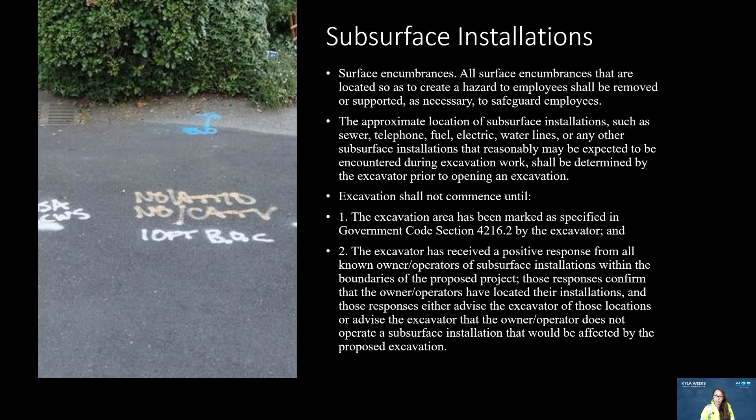When the excavation is proposed within 10 feet of a high-priority subsurface installation, the excavator shall be notified by the facility owner-operator of the existence of a high-priority subsurface installation before the legal excavation start date and time in accordance with Government Code Section 4216.2a, and an on-site meeting involving the excavator and the subsurface installation owner-operator's representative shall be scheduled by the excavator and the owner-operator at a mutually agreed upon time to determine the action or activities required to verify the location of such installations.

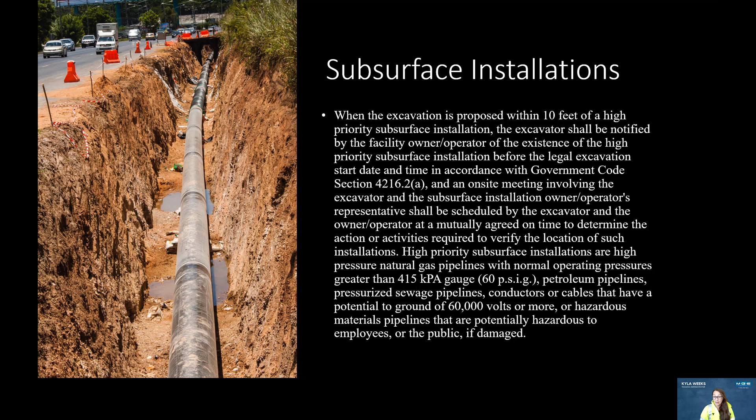High-priority subsurface installations are high-pressure natural gas pipelines with normal operating pressures greater than 415 kPa gauge (60 psi-g), petroleum pipelines, pressurized sewage pipelines, conductors or cables that have potential to ground of 60,000 volts or more, or hazardous material pipelines that are potentially hazardous to employees or the public if damaged.

All regional notification centers as defined by Government Code 4216J in the area involved, and all known owners of subsurface facilities in the area who are not members of a notification center, shall be advised of proposed work at least 2 working days prior to the start of any digging or excavation work. Exception: repair work to subsurface facilities done in response to an emergency as defined in Government Code Section 4216D.

When excavation or boring operations approach the approximate location of subsurface installations, the exact location of the installation shall be determined by safe and acceptable means that will prevent damage to the subsurface installation as provided by Government Code Section 4216.4. While the excavation is open, subsurface installations shall be protected, supported, or removed as necessary to safeguard employees.

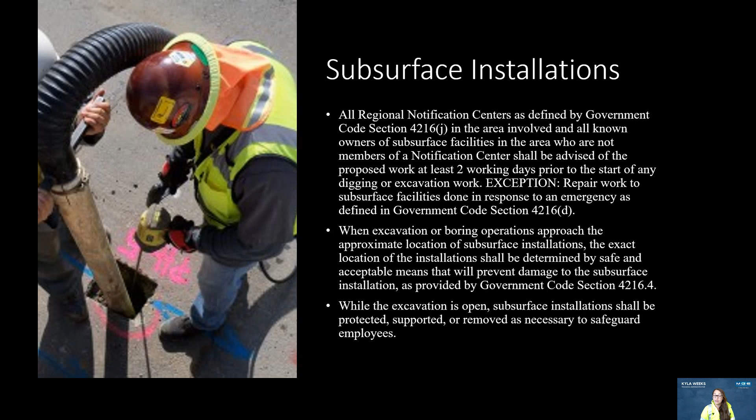An excavator discovering or causing damages to a subsurface installation shall immediately notify the facility owner-operator or contact the Regional Notification Center to obtain subsurface installation operator contact information immediately, after which the excavator shall notify the facility operator. All breaks, leaks, nicks, dents, gouges, grooves, or other damages to an installation's lines, conduits, coatings, or cathodic protection shall be reported to the subsurface installation operator.

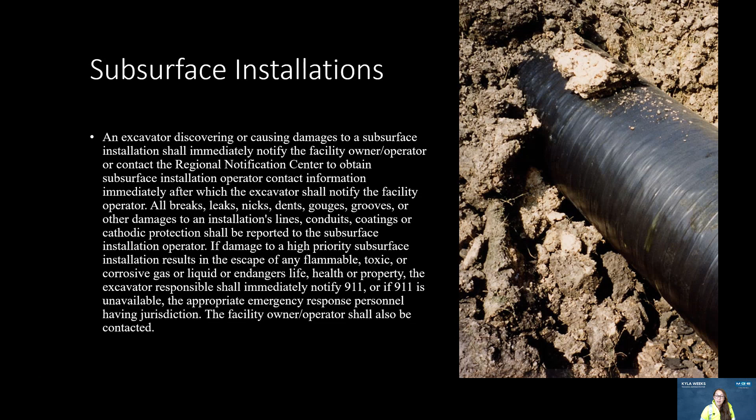If damage to a high-priority subsurface installation results in the escape of any flammable, toxic, or corrosive gas or liquid, or endangers life, health, or property, the excavator responsible shall immediately notify 911, or, if 911 is unavailable, the appropriate emergency response personnel having jurisdiction. The facility owner-operator shall also be contacted.

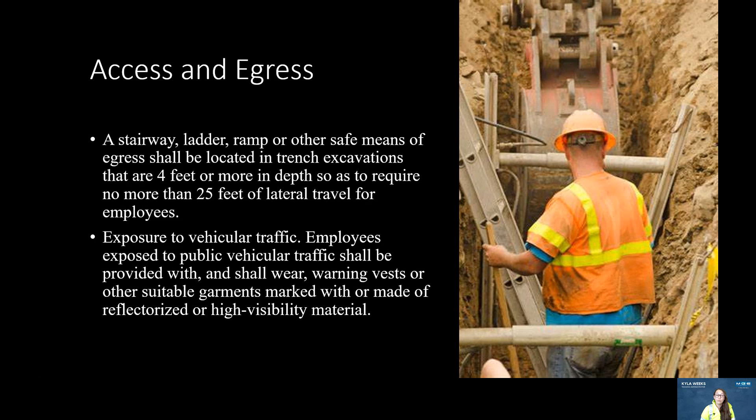Access and egress. A stairway, ladder, ramp, or other safe means of egress shall be located in trench excavations that are 4 feet or more in depth, so as to require no more than 25 feet of lateral travel for employees. Exposure to vehicular traffic. Employees exposed to public vehicular traffic shall be provided with and shall wear warning vests or other suitable garments marked with or made of reflectorized or high visibility material.

Exposure to falling loads. No employee shall be permitted underneath loads handled by lifting or digging equipment. Employees shall be required to stand away from any vehicle being loaded or unloaded to avoid being struck by any spillage or falling materials. Operators may remain in the cab of vehicles being loaded or unloaded when the vehicles are equipped in accordance with Section 1591E to provide adequate protection for the operator during loading and unloading operations.

Warning system for mobile equipment. When mobile equipment is operated adjacent to an excavation, or when such equipment is required to approach the edge of an excavation, and the operator does not have a clear and direct view of the edge of the excavation, a warning system shall be utilized, such as barricades, hand or mechanical signals, or stop logs. If possible, the grade should be away from the excavation.

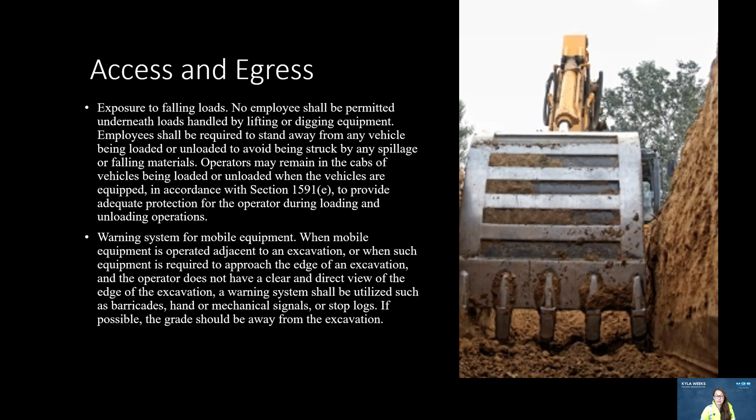Hazardous atmospheres: where oxygen deficiency, atmospheres containing less than 19.5% oxygen, or a hazardous atmosphere exists or could reasonably be expected to exist, such as in excavations in landfill areas or in areas where hazardous substances are stored nearby, the atmosphere in the excavation shall be tested before employees enter excavations greater than 4 feet in depth.

Adequate precautions shall be taken to prevent employees' exposure to atmospheres containing less than 19.5% oxygen and other hazardous atmospheres. These precautions include providing proper respiratory protection or ventilation. Adequate precautions shall also be taken, such as providing ventilation, to prevent employee exposure to an atmosphere containing a concentration of flammable gas in excess of 20% of the lower flammable limit of the gas.

When controls are intended to reduce the level of atmospheric contaminants to acceptable levels, testing shall be conducted as often as necessary to ensure that the atmosphere remains safe.

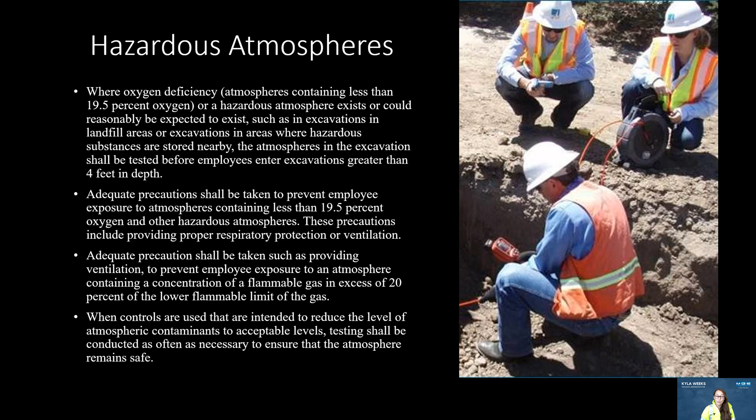Emergency rescue equipment, such as breathing apparatus, a safety harness and line, or a basket stretcher, shall be readily available where hazardous atmospheric conditions exist or may reasonably be expected to develop during work in an excavation. This equipment shall be attended when in use.

Employees entering bell-bottom pier holes or other similar deep and confined footing excavations shall wear a harness with a lifeline securely attached to it. The lifeline shall be separate from any line used to handle materials and shall be individually attended at all times while the employee wearing the lifeline is in the excavation.

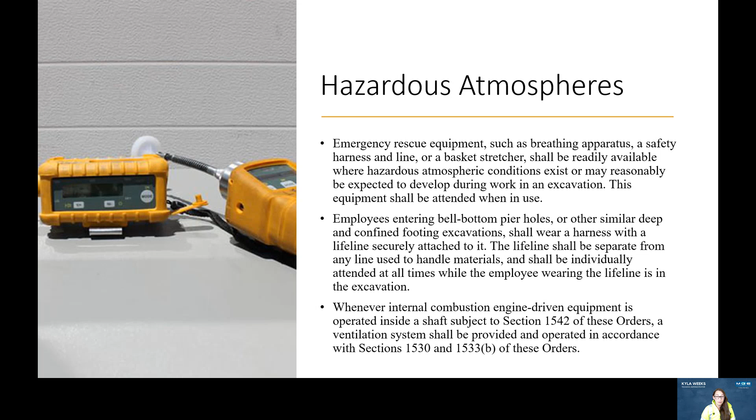Whenever internal combustion engine-driven equipment is operated inside a shaft subject to Section 1542 of these orders, a ventilation system shall be provided and operated in accordance with Sections 1530 and 1533B of these orders.

Water accumulation: employees shall not work in excavations in which there is accumulated water, or in which water is accumulating, unless adequate precautions have been taken to protect employees against hazards posed by water accumulation.

The precautions necessary to protect employees adequately vary with each situation, but could include a special support or shield system to protect from cave-ins, water removal to control the level of accumulating water, or the use of a safety harness and lifeline. If water is controlled or prevented from accumulating by the use of water removal equipment, that equipment in operation shall be monitored by a competent person to ensure proper operation.

If excavation work interrupts the natural drainage of surface water, such as streams, diversion ditches, dikes, or other suitable means shall be used to prevent surface water from entering and to provide adequate drainage of the area adjacent to the excavation. Excavations subject to runoff from heavy rains will require an inspection by a competent person in compliance with Sections 1541 H1 and H2.

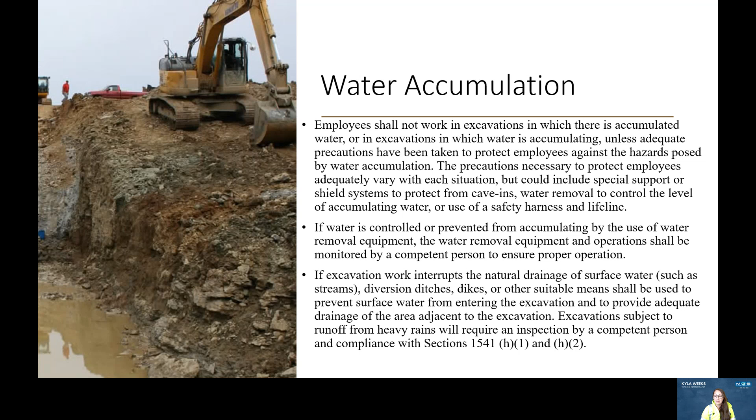Stability of adjacent structures: where the stability of adjoining buildings, walls, or other structures is endangered by excavation operations, support systems such as shoring, bracing, or underpinning shall be provided to ensure the stability of such structures for the protection of employees. Excavation below the level of the base or footing of any foundation or retaining wall that could reasonably be expected to pose a hazard to employees shall not be permitted, except when certain conditions are met.

Such excavation may only proceed when a support system such as underpinning is provided to ensure the safety of employees and the stability of the structure, or the excavation is in stable rock, or a registered professional engineer has approved the determination that such excavation work will not pose a hazard to employees. Sidewalks, pavements, and appurtenant structures shall not be undermined unless a support system or other method of protection is provided.

Appurtenant structures shall not be undermined unless a support system or other method of protection is provided to protect employees from the possible collapse of such structures.

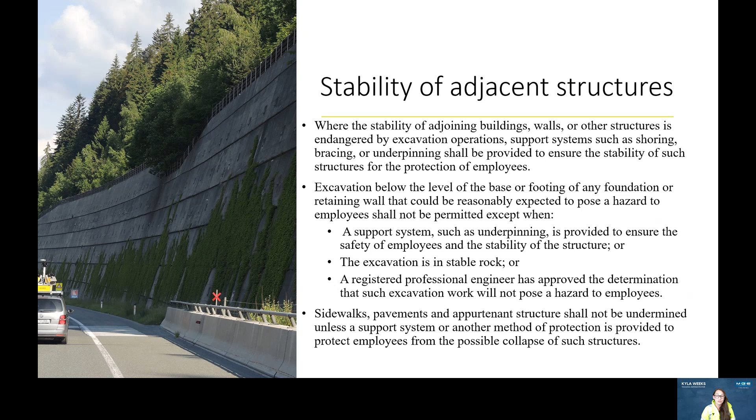Protection of employees: adequate protection shall be provided to protect employees from loose rock or soil that could pose a hazard by falling or rolling from the excavation face. Such protection shall consist of scaling to remove loose material, installation of protective barricades at intervals as necessary on the face to stop and contain falling material, or other means that provide equivalent protection.

Employees shall be protected from excavated or other materials or equipment that could pose a hazard by falling or rolling into excavations. Protection shall be provided by placing and keeping such materials or equipment at least 2 feet from the edge of excavations, or by the use of retaining devices sufficient to prevent materials or equipment from falling or rolling into excavations, or by a combination of both if necessary.

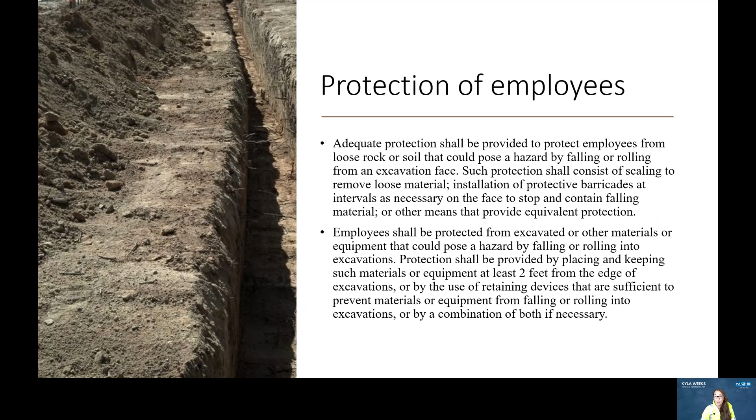Inspection: daily inspections of excavations, the adjacent areas, and protective systems shall be made by a competent person for evidence of a situation that could result in possible cave-ins, indications of failure of protective systems, hazardous atmospheres, or other hazardous conditions. An inspection shall be conducted by the competent person prior to the start of work and as needed throughout the shift. Inspections shall also be made after every rainstorm or other hazard-increasing occurrence.

These inspections are only required when employee exposure can be reasonably anticipated. Where the competent person finds evidence of a situation that could result in a possible cave-in, indications of failure of protective systems, hazardous atmospheres, or other hazardous conditions, exposed employees shall be removed from the hazardous area until necessary precautions have been taken to ensure their safety.

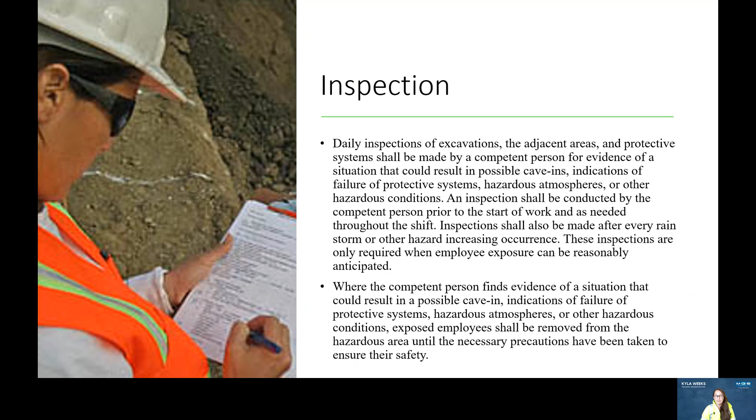Fall protection. Where employees or equipment are required or permitted to cross over excavations over 6 feet in depth and wider than 30 inches, walkways or bridges with standard guardrails shall be provided. Adequate barrier physical protection shall be provided at all remotely located excavations. All wells, pits, shafts, etc. shall be barricaded or covered. Upon completion of exploration and other similar operations, temporary wells, pits, shafts, etc. shall be backfilled.

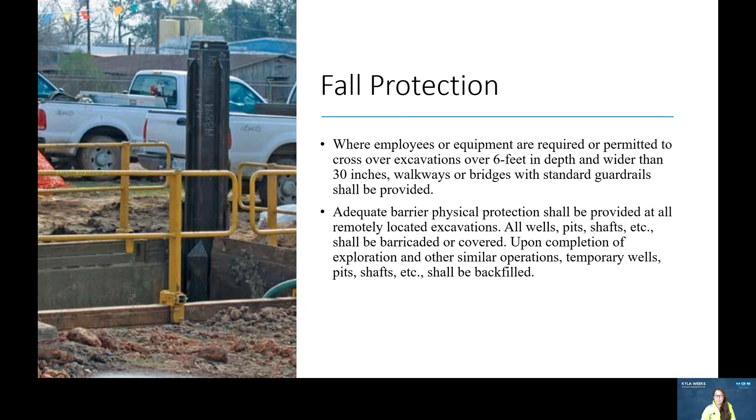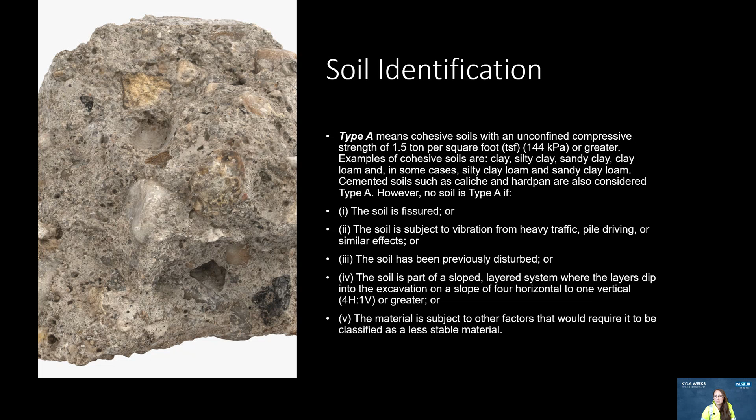Soil identification. Type A means cohesive soils with an unconfined compressive strength of 1.5 ton per square foot or greater. Examples of cohesive soils are clay, silty clay, sandy clay, clay loam, and in some cases, silty clay loam and sandy clay loam. Cemented soils such as caliche and hardpan are also considered type A. However, no soil is type A if the soil is fissured, or the soil is subject to vibration from heavy traffic, pile driving, or similar effects, or the soil has been previously disturbed, or the soil is part of a sloped layered system where the layers dip into the excavation on a slope of 4 horizontal to 1 vertical or greater.

Or the material is subject to other factors that would require it to be classified as less stable material. Type B soil means cohesive soil with an unconfined compressive strength greater than 0.5 TSF, but less than 1.5 TSF, or granular cohesionless soils including angular gravel, similar to crushed rock, silt loam, sandy loam, and in some cases, silty clay loam and sandy clay loam.

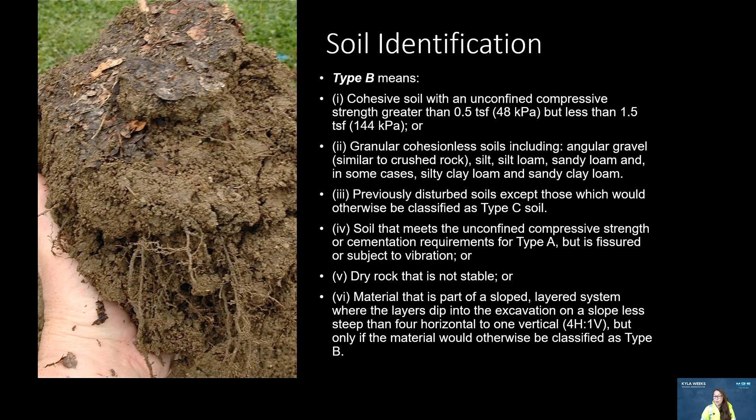Previously disturbed soils, except those which would otherwise be classified as type C soil, soil that meets the unconfined compressive strength or cementation requirements for type A but is fissured or subject to vibration, or dry rock that is not stable, or material that is part of a sloped layered system where the layers dip into the excavation on a slope less steep than 4 horizontal to 1 vertical, but only if the material would otherwise be classified as type B.

Type C means cohesive soil with an unconfined compressive strength of 0.5 TSF or less. Granular soils, including gravel, sand, and loamy sand, or submerged soil or soil from which water is freely seeping, or submerged rock that is not stable, or material in a sloped layered system where the layers dip into the excavation on a slope of 4 horizontal to 1 vertical or steeper.

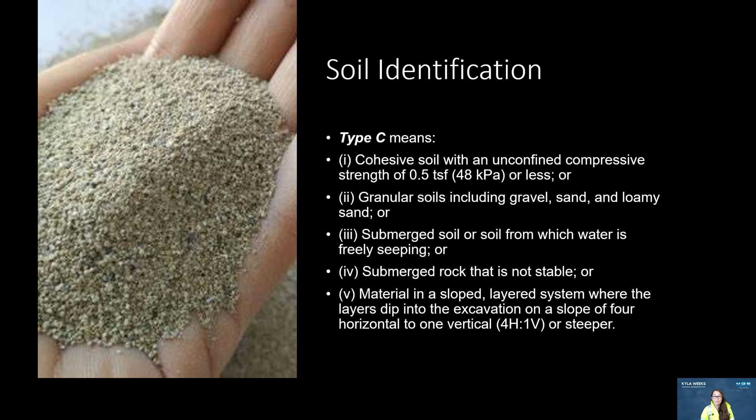Definitions. Cemented soil means a soil in which the particles are held together by a chemical agent, such as calcium carbonate, such that a hand-sized sample cannot be crushed into powder or in individual soil particles by finger pressure.

Cohesive soil means clay, fine-grained soil, or soil with a high clay content, which has a cohesive strength. Cohesive soil does not crumble, can be excavated with vertical side slopes, and is plastic when moist. Cohesive soil is hard to break up when dry and exhibits significant cohesion when submerged. Cohesive soils include clayey silt, sandy clay, silty clay, and organic clay.

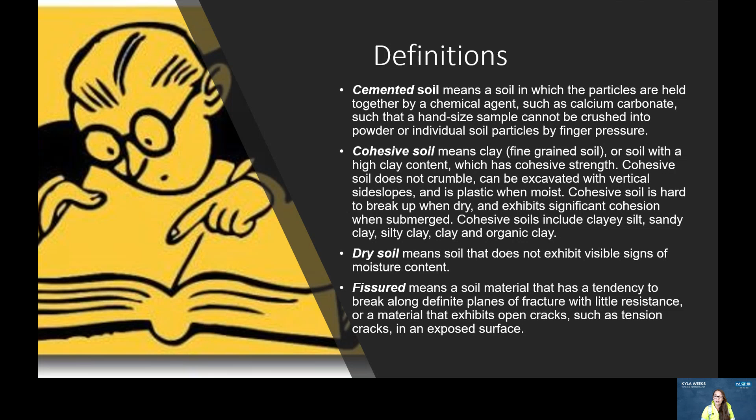Dry soil means soil that does not exhibit visible signs of moisture content. Fissured means a soil material that has a tendency to break along definite planes of fracture with little resistance, or a material that exhibits open cracks such as tension cracks in an exposed surface. Granular soil means gravel, sand, or silt, coarse grain soil, with little or no clay content. Granular soil has no cohesive strength.

Some moist granular soils exhibit apparent cohesion. Granular soil cannot be molded when moist and crumbles easily when dry. Layered system: 2 or more distinctly different soil or rock types arranged in layers. Moist soil means a condition in which a soil looks and feels damp. Moist cohesive soil can easily be shaped into a ball and rolled into a small diameter threads before crumbling.

Moist granular soil that contains some cohesive material will exhibit signs of cohesion between particles. Plastic means a property of soil which allows the soil to be deformed or molded without cracking or appreciable volume change.

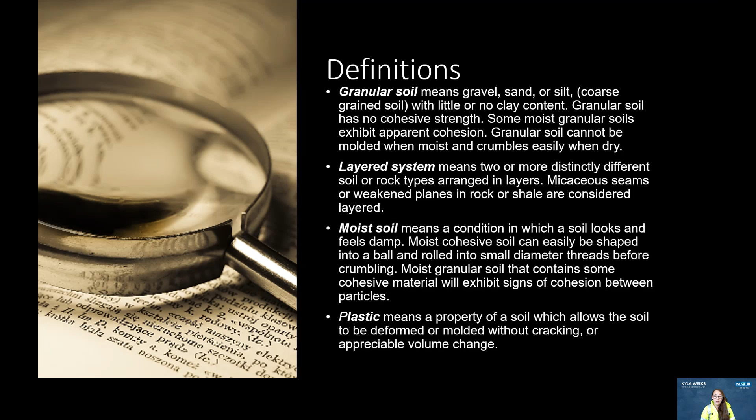Saturated soil means a soil in which the voids are filled with water. Saturation does not require flow. Saturation or near saturation is necessary for the proper use of instruments such as pocket penetrometer or shear vane.

Soil classification system means, for the purpose of this subpart, a method of categorizing soil and rock deposits in a hierarchy of stable rock, type A, type B, and type C, in decreasing order of stability. The categories are determined based on the analysis of the properties and performance characteristics of the deposits and the environmental condition of exposure. Stable rock means natural solid mineral matter that can be excavated with vertical sides and remained intact while exposed. Submerged soil means soil which is underwater or is free seeping.

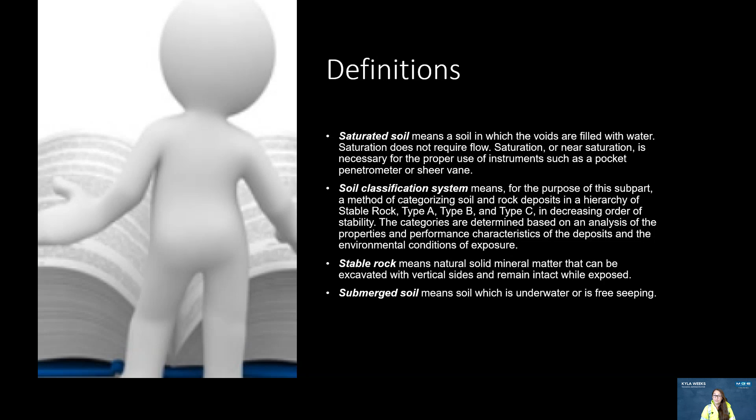Unconfined compressive strength means the load per unit area at which a soil will fail in compression. It can be determined by laboratory testing or estimated in the field using a pocket penetrometer, by thumb penetration tests, and other methods. Wet soil means soil that contains significantly more moisture than moist soil, but in such a range of values that cohesive material will slump or begin to flow when vibrated. Granular material that would exhibit cohesive properties when moist will lose those cohesive properties when wet.

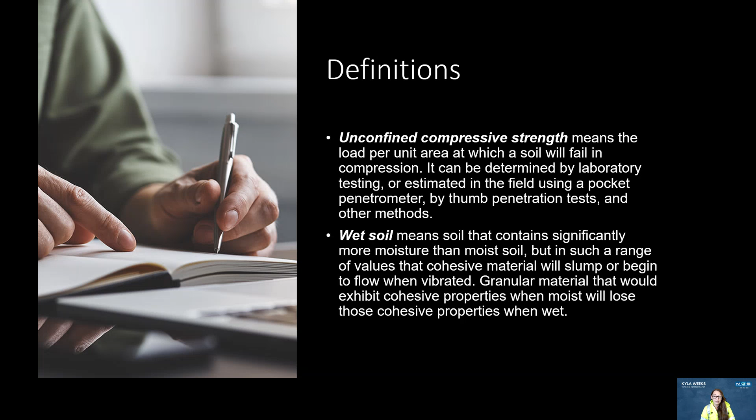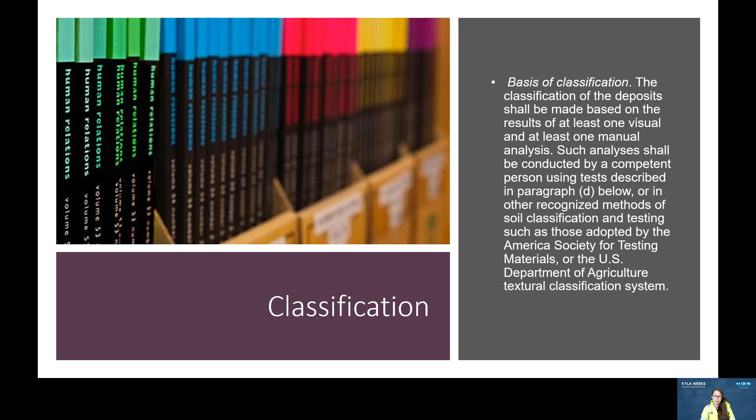Basis of classification. The classification of the deposits shall be made based on the results of at least one visual and at least one manual analysis. Such analysis shall be conducted by a competent person using tests described in paragraph D below, or in other recognized methods of soil classification and testing, such as those adopted by the American Society for Testing Materials or the U.S. Department of Agriculture Textural Classification System.

Visual test. Observe samples of soil that are excavated and soil in the sides of the excavation. Estimate the range of particle size and the relative amounts of the particle size. Soil that is primarily composed of fine-grained material is cohesive material. Soil composed primarily of coarse-grained sand or gravel is granular material.

Observe soil as it is excavated. Soil that remains in clumps when it's excavated is cohesive. Soil that breaks up easily and does not stay in clumps is granular.

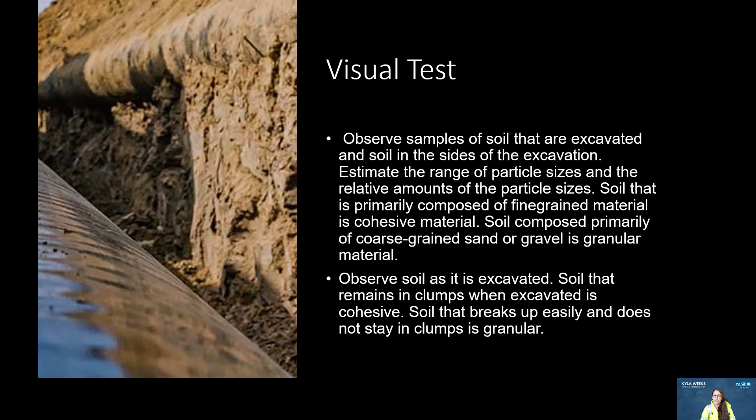Observe the side of an open excavation and the surface area adjacent to the excavation. Crack-like openings, such as tension cracks, could indicate fissured material. If chunks of soil spall off a vertical side, the soil could be fissured. Small spalls are evidence of moving ground and are indications of potentially hazardous situations.

Observe the area adjacent to the excavation and the excavation itself for evidence of existing utility and other underground structures, and to identify previously disturbed soil.

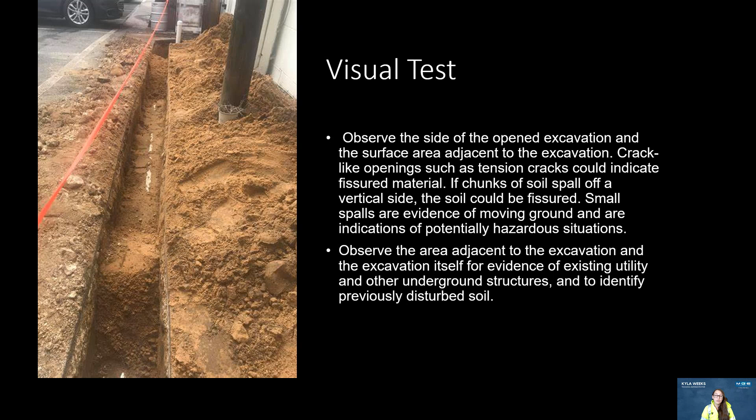Observe the open side of the excavation to identify layered systems. Examine layered systems to identify if the layers slope toward the excavation. Estimate the degree of slope of the layers.

Observe the area adjacent to the excavation and the sides of the open excavation for evidence of surface water, water seeping from the sides of the excavation, or the location of the level of the water table.

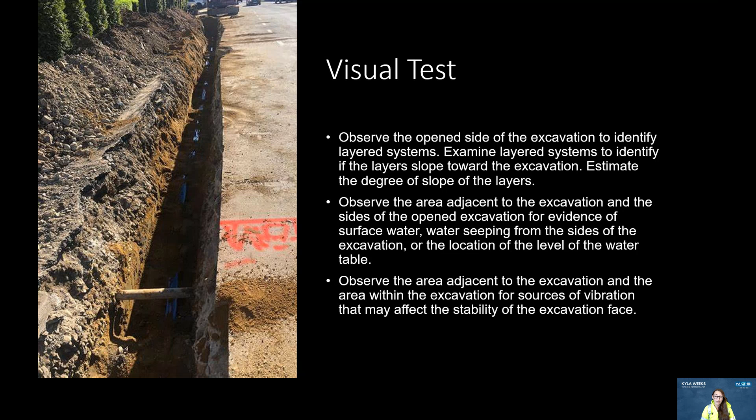Observe the area adjacent to the excavation and the area within the excavation for sources of vibration that may affect the stability of the excavation face. Manual tests.

Plasticity. Mold a moist or wet sample of soil into a ball and attempt to roll it into a thread as thin as 1/8 inch in diameter. Cohesive material can be successfully rolled into threads without crumbling. For example, if at least a 2-inch, 50mm length of 1/8 inch thread can be held on one end without tearing, the soil is cohesive.

Dry strength. If the soil is dry and crumbles on its own or with moderate pressure into individual grains or fine powder, it's granular - any combination of gravel, sand, or silt. If the soil is dry and falls into clumps, which break up into smaller clumps, but the smaller clumps can only be broken up with difficulty, it may be clay in any combination with gravel, sand, or silt. If the dry soil breaks into clumps, which do not break into small clumps, and which can only be broken with difficulty, and there's no visual indication that the soil is fissured, the soil may be considered unfissured.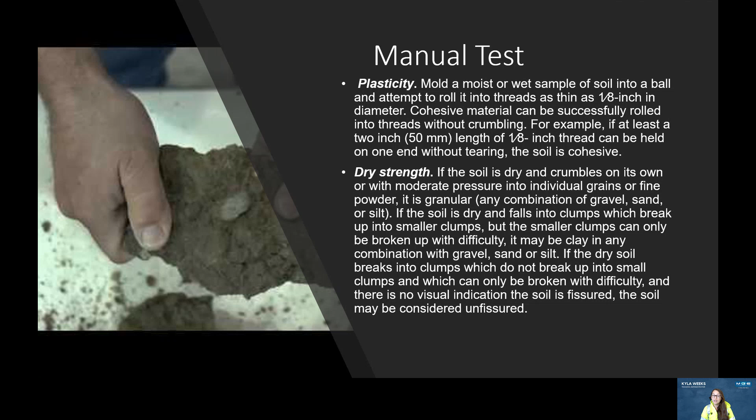Thumb penetration. The thumb penetration test can be used to estimate the unconfined compressive strength of cohesive soils. This test is based on the thumb penetration test described in the American Society for Testing and Materials, ASTM, standard designation D2488, Standard Recommended Practice for Description of Soils, Visual Manual Procedure.

Type A soils with an unconfined compressive strength of 1.5 TSF can be readily indented by the thumb; however, they can be penetrated by the thumb only with great effort. Type C soils with unconfined compressive strength of 0.5 TSF can be easily penetrated several inches by the thumb and can be molded by light finger pressure.

This test should be conducted on an undisturbed soil sample, such as a large clump of spoil, as soon as practical after excavation to keep to a minimum the effects of exposure to drying influences. If the excavation is later exposed to wetting influences, rain, flooding, the classification of the soil must be changed accordingly.

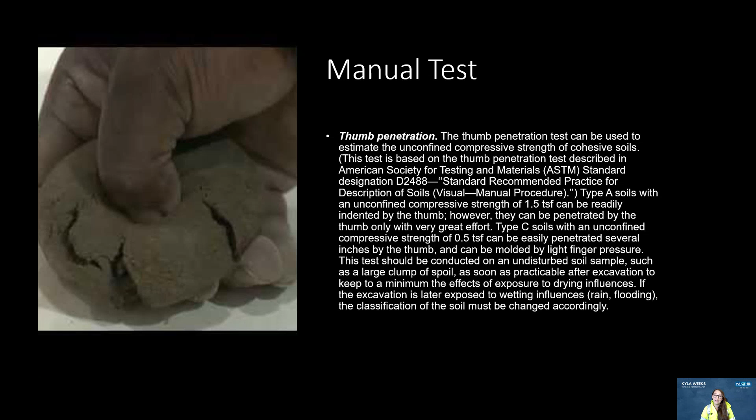Other strength tests. Estimates of unconfined compressive strength of soils can be obtained by using a pocket penetrometer or by using a hand-operated shear vane.

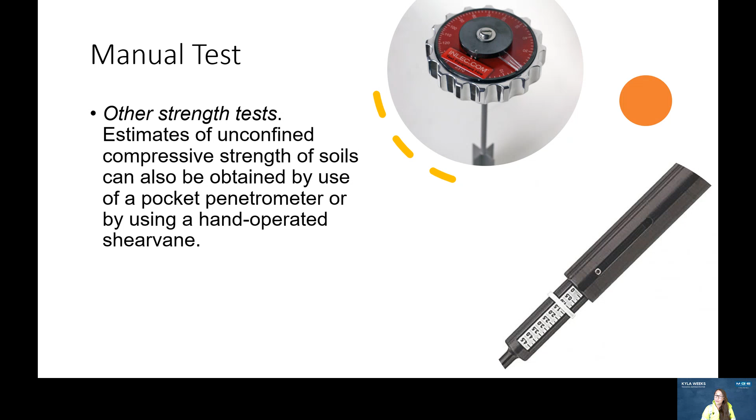Drying test. The basic purpose of a drying test is to differentiate between cohesive materials with fissures, unfissured cohesive material, and granular material. The procedure for the drying test involves drying a sample of soil that is approximately 1 inch thick and 6 inches in diameter until it is thoroughly dry. If the sample develops cracks as it dries, significant fissures are indicated.

Samples that dry without cracking are to be broken by hand. If considerable force is necessary to break a sample, the soil has significant cohesive material content. The soil can be classified as an unfissured cohesive material, and the unconfined compressive strength should be determined.

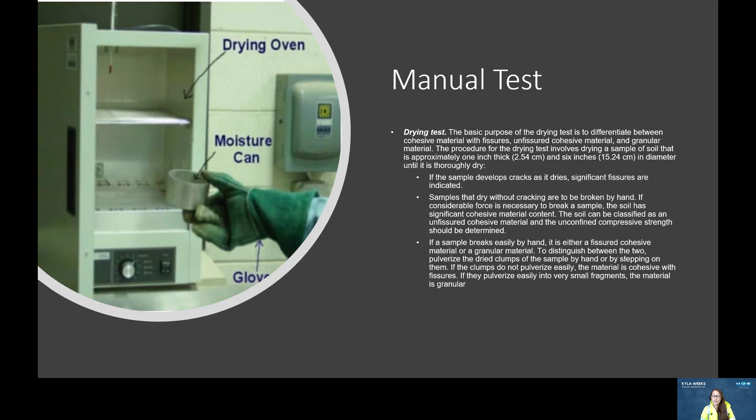If a sample breaks easily by hand, it is either a fissured cohesive material or granular material. To distinguish between the two, pulverize the dry clumps of the sample by hand or by stepping on them. If the clumps do not pulverize easily, the material is cohesive with fissures. If they pulverize easily and into very small fragments, the material is granular.

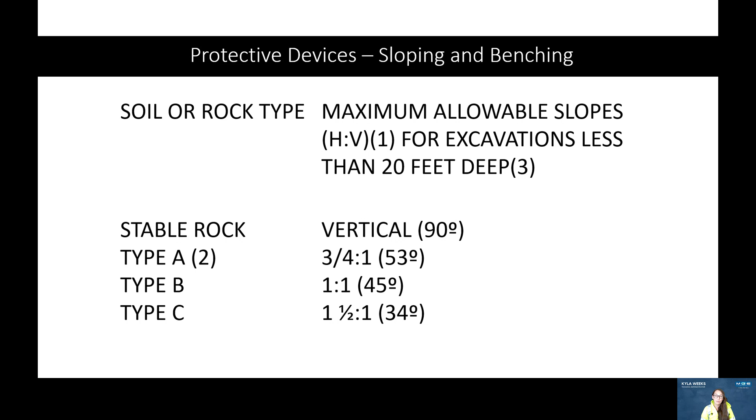Protective devices, sloping and benching. Stable rock will have a maximum allowable slope for excavations less than 20 feet of vertical, 90 degrees. Type A will have 3/4 to 1, Type B will have a 1 to 1, and Type C will have a 1.5 to 1.

Excavations made in Type B soil, if less than 20 feet, shall have a maximum allowable slope of 1 to 1. All benched excavations 20 feet or less in depth shall have a maximum allowable slope of 1 to 1 and maximum bench dimensions as follows.

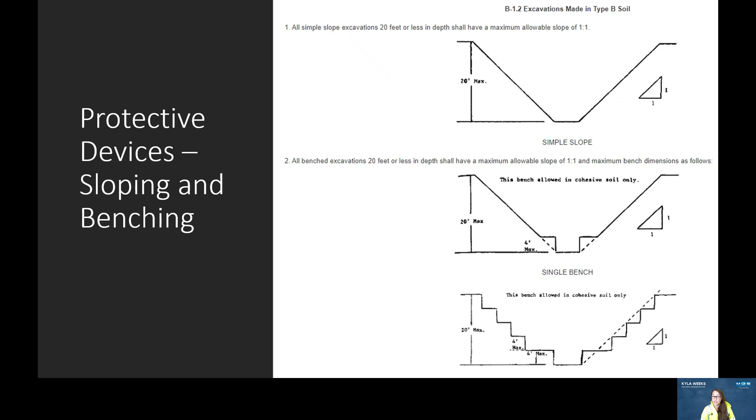For Type C material, all simple slope excavations 20 feet or less in depth shall have a maximum allowable slope of 1.5 to 1. All excavations 20 feet or less in depth that have a vertical sided lower portion shall be shielded or supported to a height of at least 18 inches above the top of the vertical side. All such excavations shall have a maximum allowable slope of 1.5 to 1.

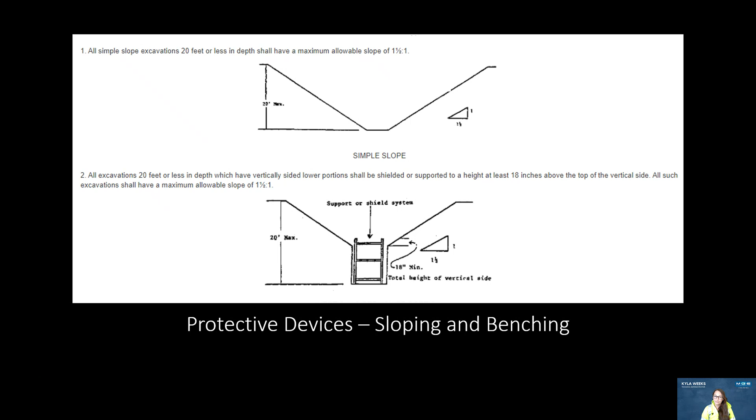Protective devices, aluminum hydraulic shoring. 2-inch cylinders shall be a minimum 2-inch inside diameter with a safe working capacity of not less than 18,000 pounds axial compressive load at maximum extension. Maximum extension is to include full range of cylinder extensions as recommended by product manufacturer.

3-inch cylinders shall be a minimum 3-inch inside diameter with safe working capacity of not less than 30,000 pounds axial compressive load at maximum extension. Maximum extension is to include full range of cylinder extensions as recommended by product manufacturer.

All spacing indicated is measured center to center. Vertical shoring rails shall have a minimum section modulus of 0.40 inch. When vertical shores are used, there must be a minimum of 3 shores spaced equally horizontally in a group.

Plywood shall be 1.125 inch thick softwood or 0.75 inch thick 14 ply Arctic white birch Finland form. Please note that plywood is not intended as a structural member, but only for prevention of local raveling or sloughing of the trench face between shores.

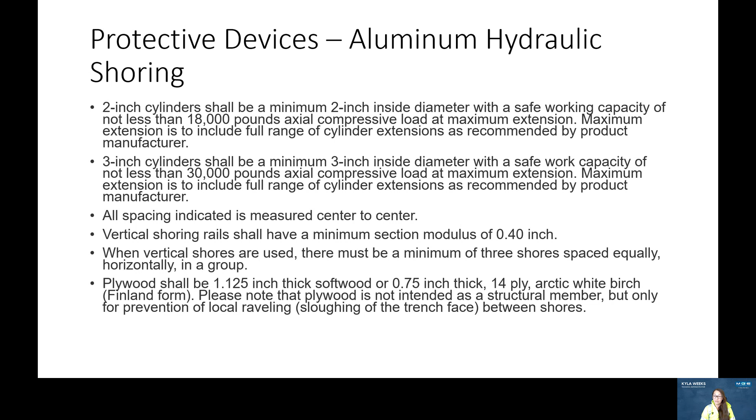Example 1. A trench dug in Type A soil is 6 feet deep and 3 feet wide. From Table D1.1, find vertical shores and 2-inch diameter cylinder spaced 8 feet on center horizontally and 4 feet on center vertically. See figures 1 and 3 for typical installations.

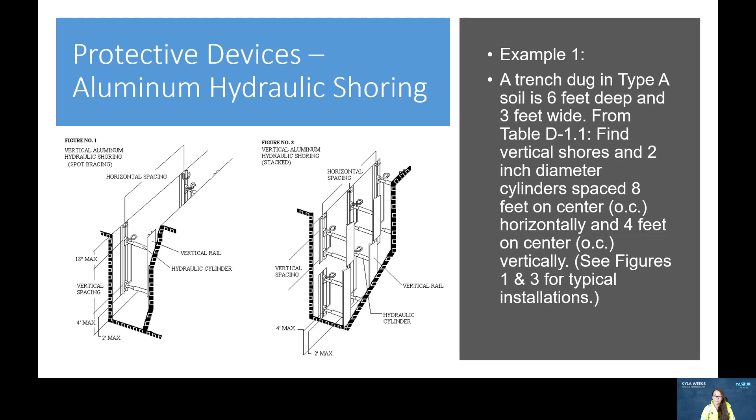Example 2. A trench is dug in Type B soil that does not require sheeting, 13 feet deep and 5 feet wide. From Table D1.2, find vertical shores for 2-inch diameter cylinders spaced 6.5 feet OC horizontally and 4 feet OC vertically. See figures 1 and 3 for typical installations.

Example 3. A trench is dug in Type B soil that does not require sheeting, but does experience some minor raveling of the trench face. The trench is 16 feet deep and 9 feet wide. From Table D1.2, find vertical shores and 2-inch diameter cylinder with special oversleeves as designated by footnote number 2, spaced 5.5 feet OC horizontally and 4 feet OC vertically. Plywood, per footnote G7 to the D1 table, should be used behind the shores. See figures 2 and 3 for typical installations.

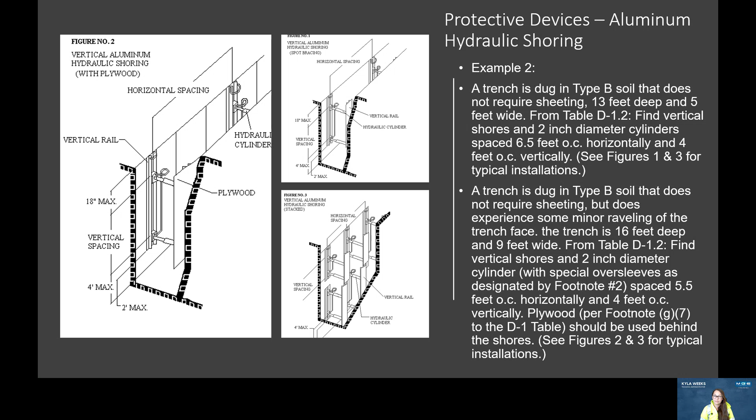Example 4. A trench is dug in previously disturbed Type B soil with characteristics of a Type C soil and will require sheeting. The trench is 18 feet deep and 12 feet wide. An 8-foot horizontal spacing between cylinders is desired for working space. From Table D1.3, find horizontal wale with a section modulus of 14 spaced at 4 feet OC vertically and 3-inch diameter cylinder spaced at 9 feet maximum OC horizontally. 3 by 12 timber sheeting is required at close spacing vertically. See figure 4 for typical installation.

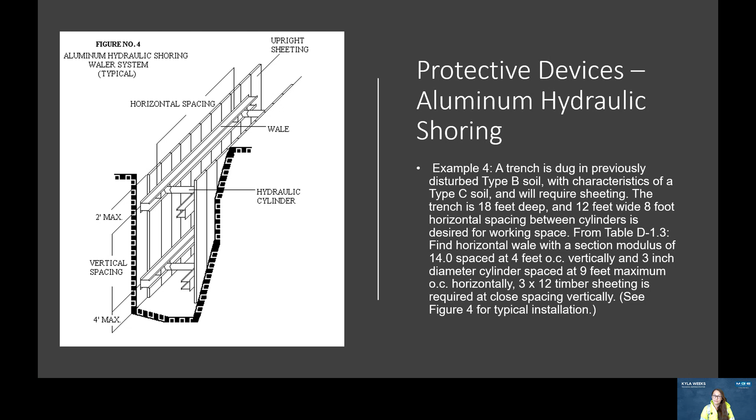Example 5. A trench is dug in Type C soil, 9 feet deep and 4 feet wide. Horizontal cylinder spacing in excess of 6 feet is desired for working space. From Table D1.4, find horizontal wale with a section modulus of 7.0 and 2-inch diameter cylinder spaced at 6.5 feet OC horizontally, or find horizontal wale with a 14 section modulus and 3-inch diameter cylinder spaced at 10 feet OC horizontally. Both wales are spaced at 4 feet OC vertically. 3 by 12 timber sheeting is required at close spacing vertically. See figure 4 for typical installation.

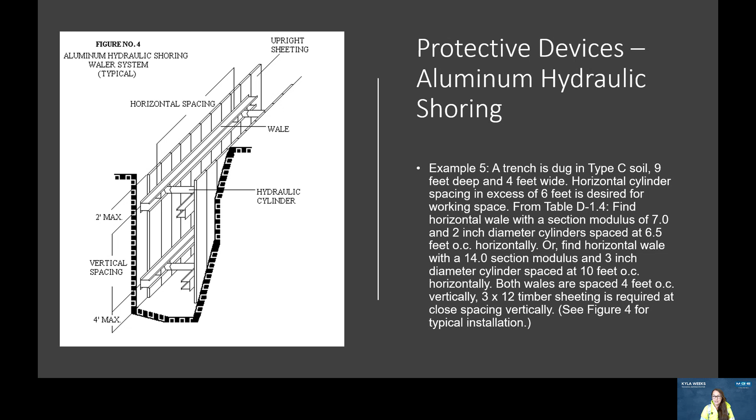That's it for the training on trenching and excavations competent person.